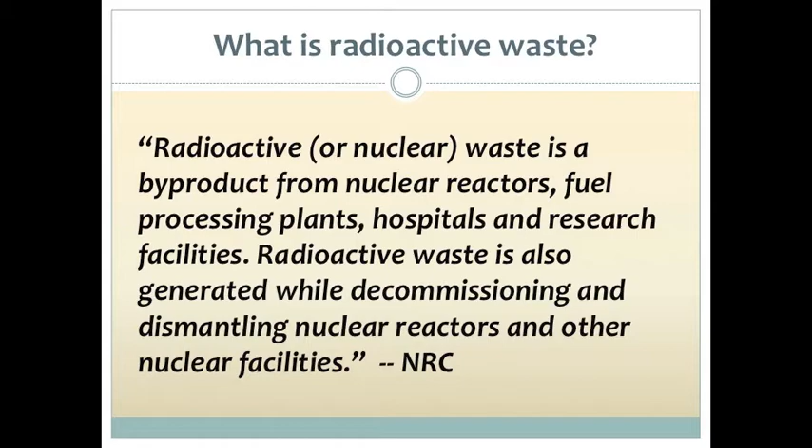So, to begin, what is radioactive waste? The Nuclear Regulatory Commission, the NRC, defines radioactive waste this way. Radioactive or nuclear waste is a byproduct from nuclear reactors, fuel processing plants, hospitals and research facilities, and also weapons manufacturing. Radioactive waste is also generated while decommissioning and dismantling nuclear reactors and other nuclear facilities.

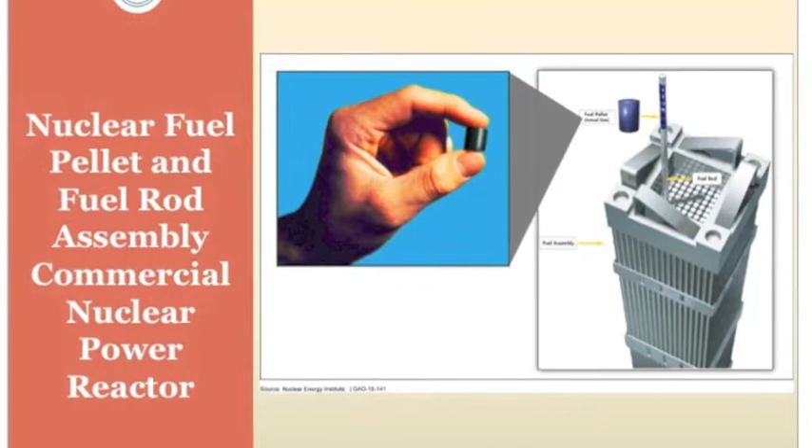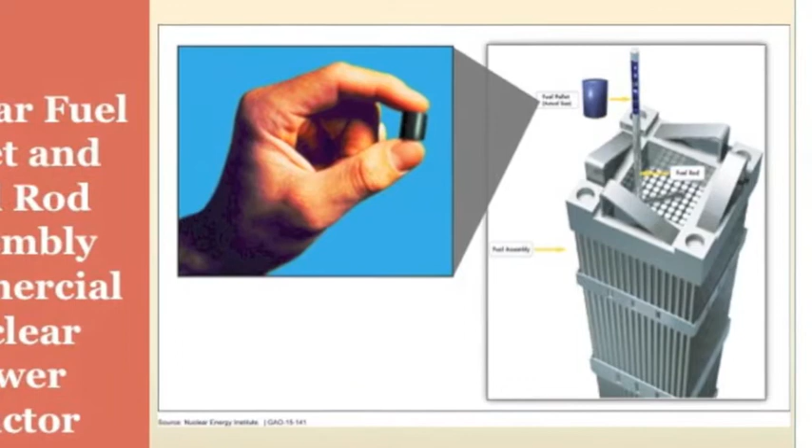Fuel for commercial nuclear reactors is typically made from low-enriched uranium fashioned into thumbnail-sized ceramic pellets of uranium dioxide. These pellets are fitted into 12 to 15-foot hollow rods referred to as cladding, which are made of a zirconium alloy. The rods are then bound together into a larger assembly. A typical reactor holds about 200 to 800 fuel assemblies. Before the rods are used, they are only slightly radioactive, and they can be handled without special shielding.

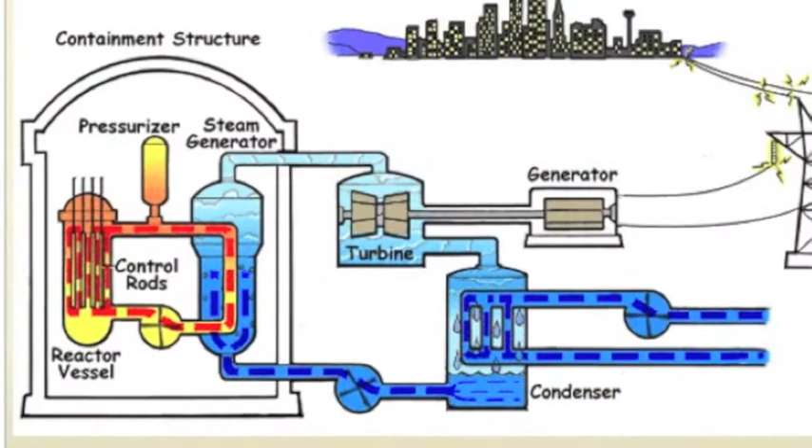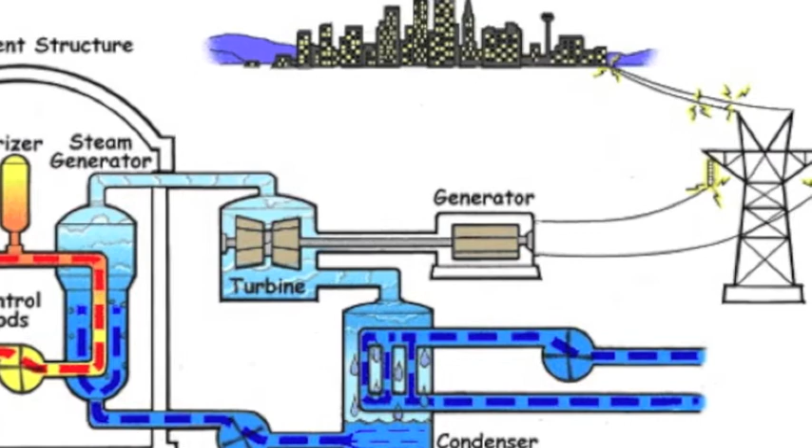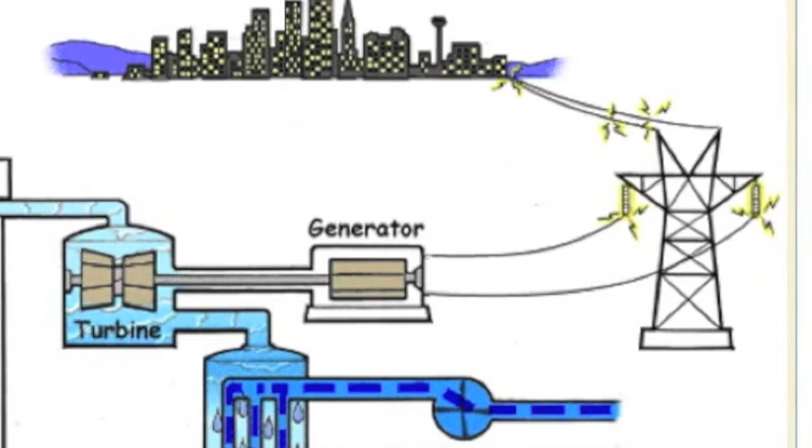The uranium in the assemblies undergoes fission, which is a process of splitting atoms into fragments and neutrons that then bombard other atoms, resulting in additional fission reactions and a sustainable chain reaction that creates enormous amounts of heat and radioactivity in the form of radioisotopes or radioactive substances. The heat is used to generate steam, to turn a turbine, which generates electricity. And we all know the saying is that nuclear power is the most dangerous and most costly way to boil water on the planet.

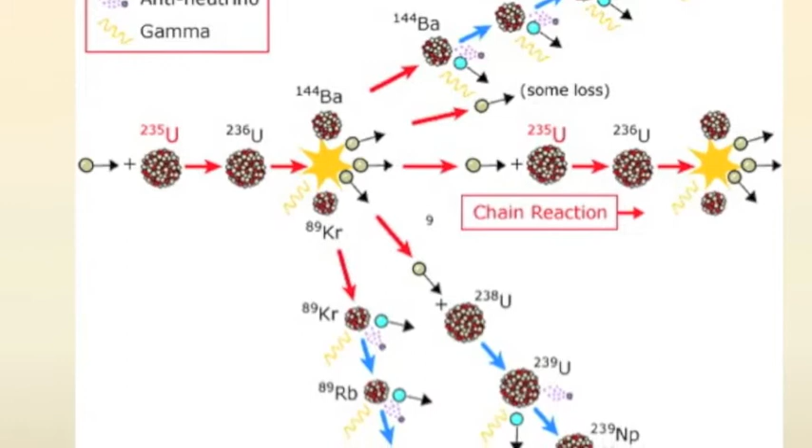During the fission process, 2 things happen to the uranium in the fuel. First, uranium atoms split, creating energy that's used to produce electricity. The fission creates radioactive isotopes of lighter elements such as cesium-137 and strontium-90. These isotopes account for most of the heat and penetrating radiation in high-level waste. Second, some uranium atoms capture neutrons during fission. These atoms form heavier elements such as plutonium. These heavier than uranium, or transuranic elements, do not produce nearly the amount of heat or penetrating radiation that fission products do, but they take much longer to decay. Transuranic waste, also called TRU, accounts for most of the radioactive hazard remaining in high-level waste after 1,000 years.

Radioactive isotopes eventually decay or disintegrate to harmless materials. Some isotopes decay in hours or even minutes, but others decay very slowly. Strontium-90 and cesium-137, for instance, have half-lives of about 30 years, which means half of the radioactivity will decay in 30 years. Plutonium-239 has a half-life of 24,000 years.

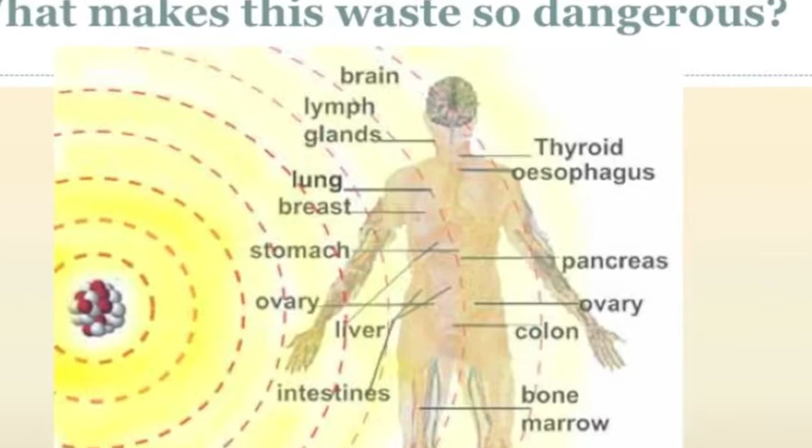All of these radioactive isotopes have the capacity to severely affect and destroy DNA, causing disease and illness. Iodine-131, for instance, concentrates in the thyroid, causing thyroid cancer. People are contaminated with it by drinking milk from cows that have eaten contaminated grass. It also affects the ovaries, which causes birth defects, mutations, and miscarriages.

Strontium-90 mimics calcium, so it goes straight to the bone, and it can cause leukemia, and is most dangerous for pregnant women and fetuses. Cesium-137's half-life of about 30 years is long enough that objects and regions contaminated by cesium-137 remain dangerous to humans for a generation or more, but it is short enough to ensure that even relatively small quantities of cesium-137 release dangerous doses of radiation.

Plutonium-239 emits alpha radiation. It is highly toxic as well as long-lived. One microscopic speck in the lung will cause lung cancer. Once it enters your body, it will never leave.

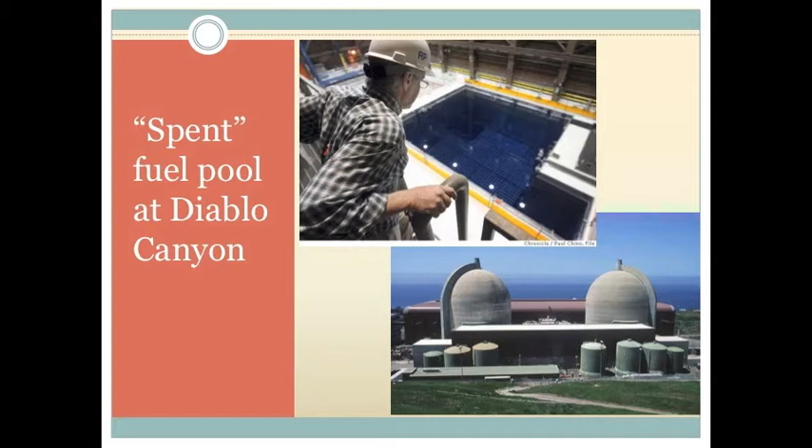Each of Diablo Canyon's 2 reactor units are refueled about every 18 months. Once a reactor core has gone critical, meaning it has been used during a reactor operation, highly radioactive nuclear fission products have formed in the core, and the core has become highly radioactive. Refueling involves taking the expended core out of the reactor and putting in a new core with fresh nuclear fuel.

When reactor operators first remove spent fuel from a reactor, it is thermally hot and intensely radioactive and must be immersed in deep pools of water, which cools the spent fuel and shields the environment from it. These are called spent fuel pools.

The spent fuel pool at Diablo Canyon is in an in-ground pool covered by a large metal building, and that is the rectangular building just this side of the domes. That is where the spent fuel pools are housed.

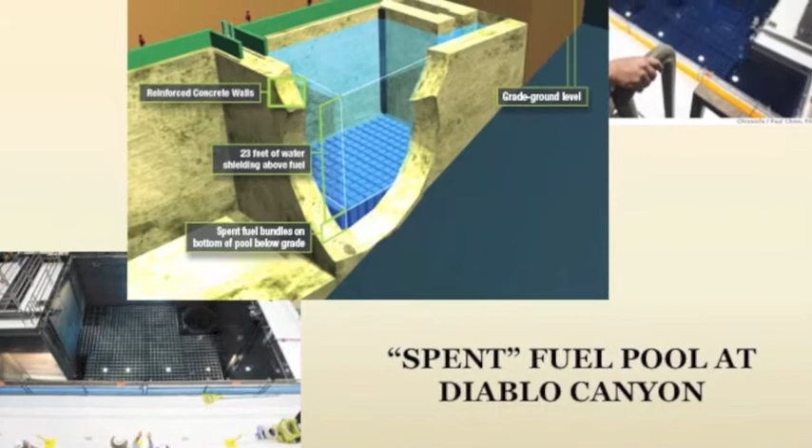Water loss in the spent fuel pool could lead to a catastrophic spent fuel pool fire. Water could be lost from a spent fuel pool through leakage, boiling, siphoning, pumping, displacement of objects falling into the pool, or overturning of the pool.

These modes of water loss could arise from events, alone or in combination, that include acts of malice or terrorism by persons within or outside the plant, an accidental aircraft impact, an earthquake, dropping of a fuel cask, accidental fire or explosions, and a severe accident in the adjacent reactor, which, through the spread of radioactive material and other influences, affects the ongoing cooling and/or water makeup of the pool.

If the fuel were exposed to air and steam, the zirconium cladding would react exothermically, catching fire at about 800 degrees Celsius. This type of fire is almost impossible to extinguish.

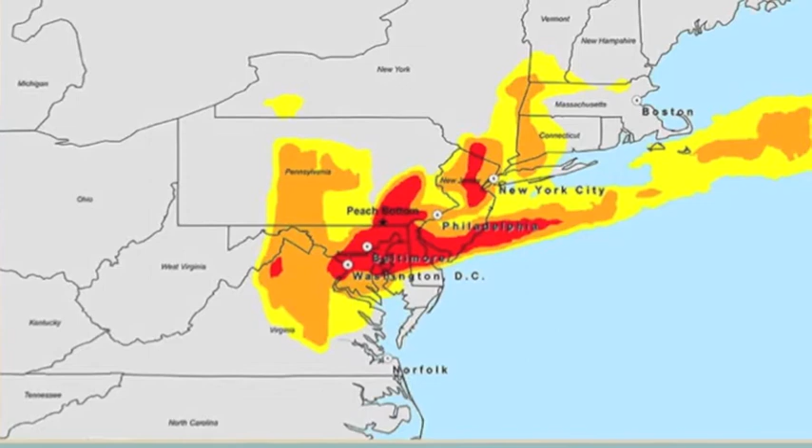This image captures the spread of radioactivity from a hypothetical fire in a high-density spent fuel pool at the Peach Bottom Nuclear Power Plant in Pennsylvania. Imagine, if you will, that plume extending away from Diablo Canyon.

Of great concern is the large amount of cesium-137 that is contained in the pools. That can be anywhere from 20 to 50 million curies of this dangerous isotope. With a half-life of 30 years, cesium-137 gives off highly penetrating radiation and is absorbed in the food chain as if it were potassium.

As much as 100% of the pool's cesium-137 would be released into the environment if there were a spent fuel fire, according to the NRC.

Spent nuclear fuel typically must remain in a pool for at least 5 years to decay enough to remain within the heat limits currently allowed for dry cask storage systems. When spent fuel is discharged from a reactor at a plant where the spent fuel pool is at maximum capacity, spent fuel equal to the amount of the spent fuel discharged from the reactor must be transferred to dry storage.

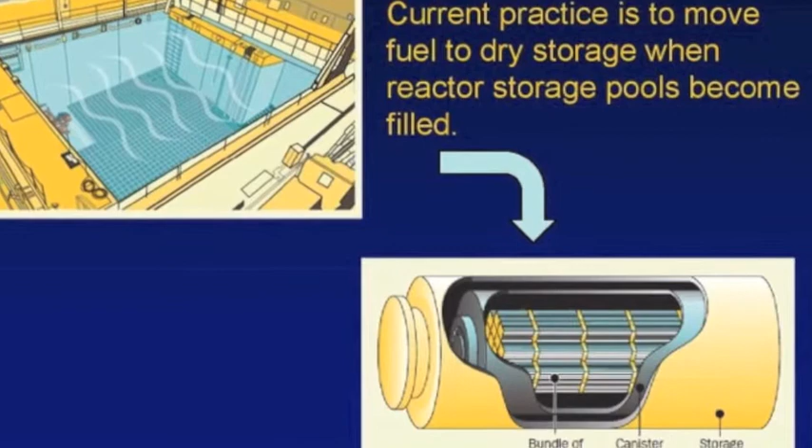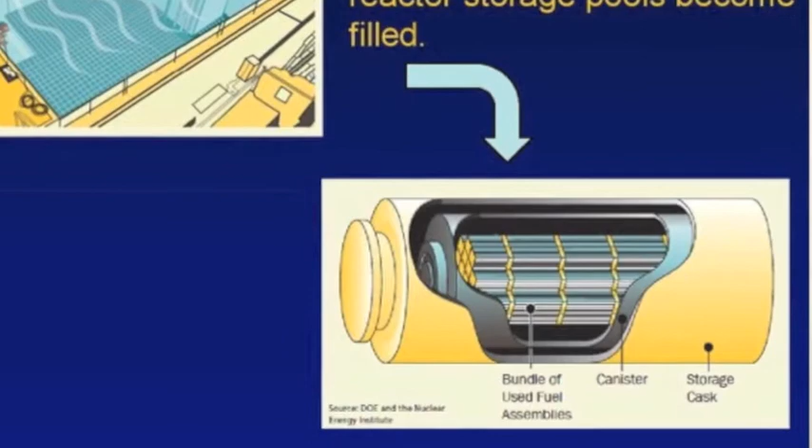The dry storage systems typically consist either of a thick-wall bolted steel vertical cask or a welded steel canister inside a vertical or horizontal steel reinforced concrete cask, and that's what they have at Diablo.

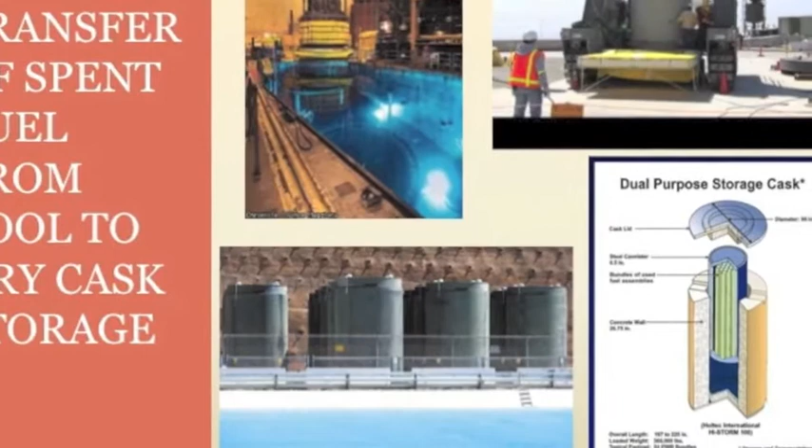To transfer spent fuel to dry storage, reactor operators place a steel canister inside a larger steel transfer cask and lower both into a pool. Spent nuclear fuel is loaded into the canister, a lid is placed on the canister, and then both the canister and transfer cask are removed from the pool. The transfer cask shields nearby workers from the radiation produced by the spent fuel in the canister.

The water is drained and a lid is welded onto the canister. Then the canister and the transfer cask are aligned with a storage cask, and the canister is maneuvered into the storage cask. A lot of room for human error there. And that transfer cask can be reused.

So Diablo Canyon is currently using on-site dry cask storage. And as you will notice, especially up in the center there, that they're in the open, bolted to a concrete pad with no protection from acts of malice or terrorism, accidental aircraft impact, or other catastrophic events.

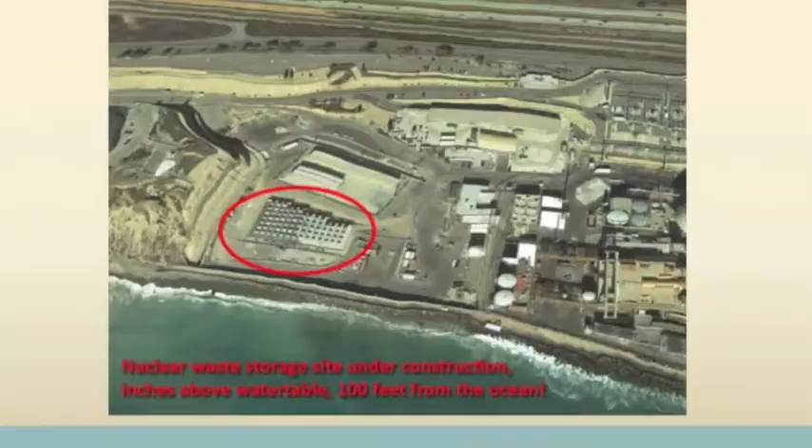At Diablo Canyon, at least the dry cask storage is uphill from the plant and a pretty great distance away from the ocean. At San Onofre, it's just inches above the water line and about 100 feet away from the ocean.

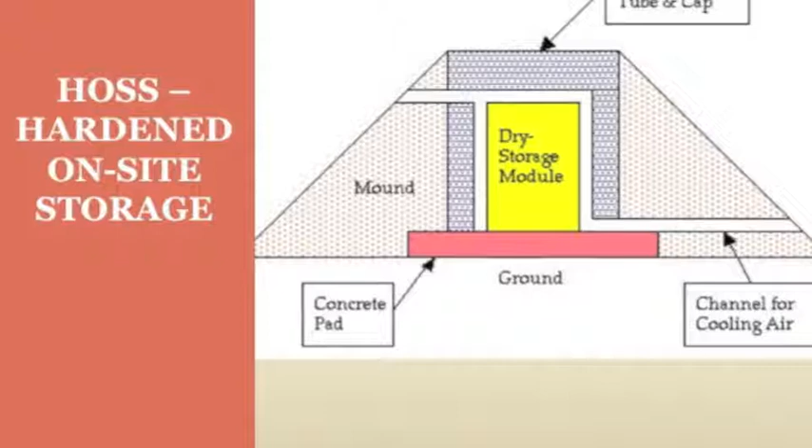So isn't there a better way? You may be asking. Yes, there is. Hardened on-site storage, or HOSS, allows waste generators to store high-level waste as close to the site of generation as possible, thereby exposing fewer people to radiation as safely as possible.

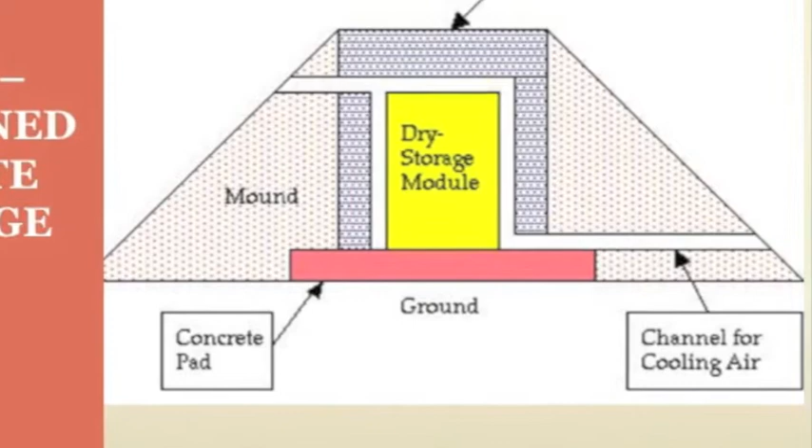Rather than storing dozens of vulnerable dry casks next to each other in the open air, the HOSS principles, established by concerned citizen mandate: irradiated fuel must be stored as safely as possible, as close to the site of generation as possible.

HOSS facilities must not be regarded as permanent waste storage and thus should not be constructed underground, and the waste must be retrievable. The facility must have real-time radiation and heat monitoring for early detection of problems with containers. The overall objective of HOSS should be that the amount of releases projected in even severe attacks should be low enough that the storage system would be unattractive as a terrorist target. Placement of the individual canisters should be such that they're difficult to detect from outside of the area.

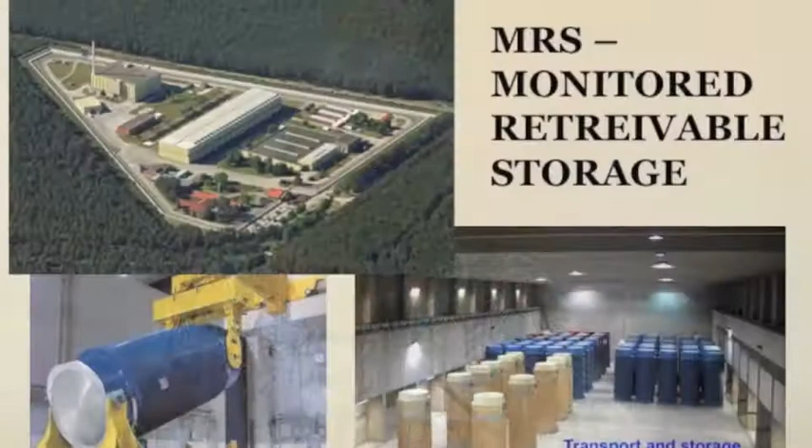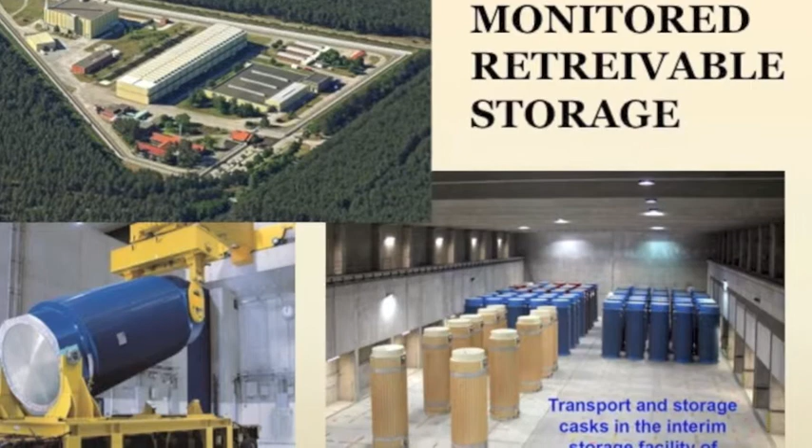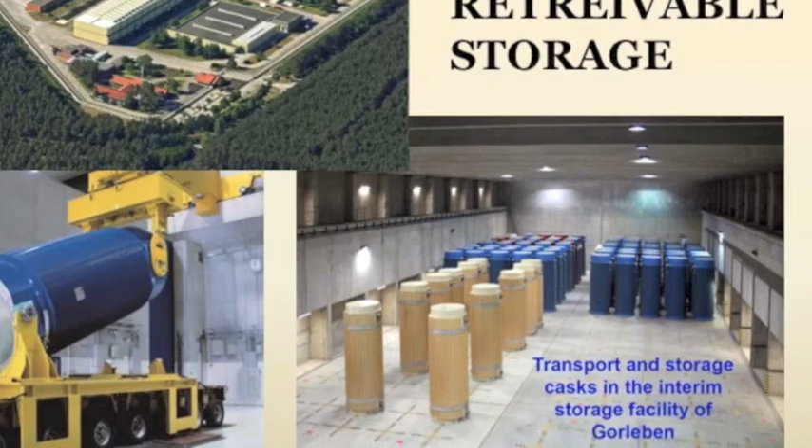In Germany, they have interim storage of their waste in what are called monitored retrievable storage systems. These buildings were originally designed to provide additional radiation shielding beyond that provided by the cask itself, to reduce doses at plant site boundaries to background levels. Some of these buildings are sufficiently robust to provide protection against crashes of aircraft. The casks are able to be continually monitored and can be repaired robotically, and any leaks or other release of radioactivity would be contained in the building.

We in San Luis Obispo County are not the only ones dealing with this issue. There are nuclear power plants that have been closed for quite a while, like Humboldt and Rancho Seco. There are nuclear power plants that have recently closed, such as San Onofre, Vermont Yankee, and Fort Calhoun. And there are nuclear power plants that are scheduled to close, such as Diablo Canyon. Each and every one of these facilities has produced thousands of tons of nuclear waste that will have to be kept isolated from the environment, and all have tough decisions to make about how to do so in the safest manner possible.

The big question remains: how will this waste be safely stored, isolated from the environment for thousands of years? Is there a final answer?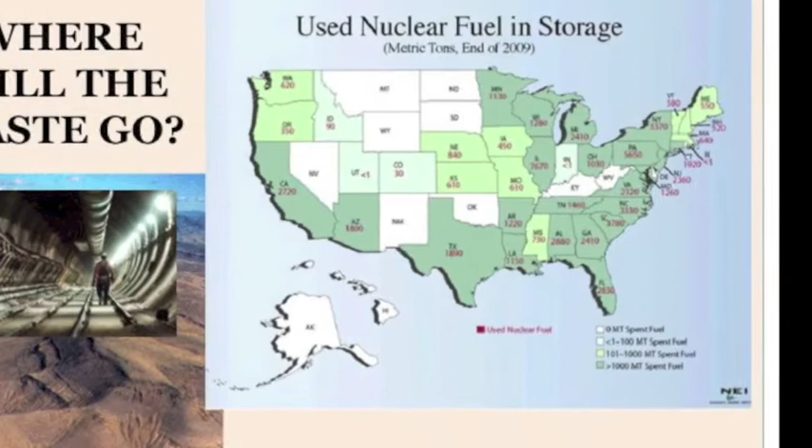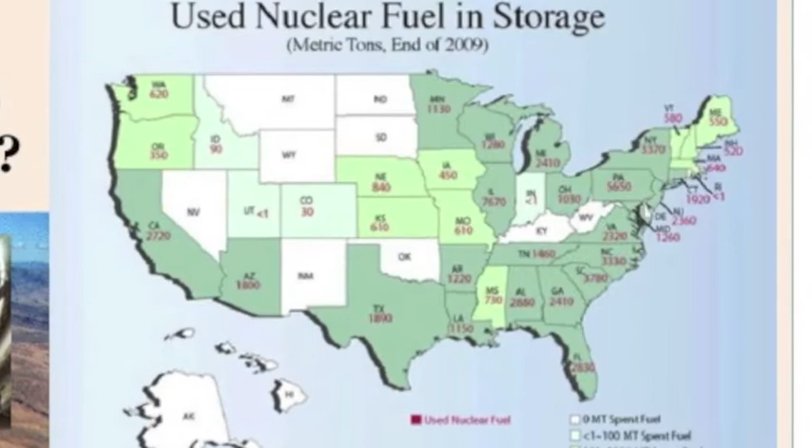At this time, there is well over 76,000 metric tons of spent nuclear fuel that has been produced by nuclear power plants nationwide, and the inventory is increasing by about 2,200 metric tons a year. In addition, nuclear weapons production and other defense-related activities have resulted in about 13,000 metric tons of spent nuclear fuel and other high-level waste. This high-level waste is extremely radioactive and needs to be isolated and shielded to protect human health and the environment. It is currently being stored primarily at sites where it was generated, like Diablo Canyon. After spending decades and billions of taxpayer dollars to research potential sites for a permanent disposal site, including the Yucca Mountain site in Nevada, the nation remains without a repository for disposal, and future projects are unclear.

They are trying to revive Yucca Mountain, and that's what we will be talking about next time.

It is clear that we have a lot of work to do in order to protect our coastline, ourselves, and our future generations from the nuclear waste that will be left behind when Diablo Canyon closes. What we are left with are a lot of questions and a lot of work to do.

So I am now pleased to introduce to you Donna Gilmore of San Onofre Safety. She has done an incredible amount of research into the casks that are used in dry cask storage, as well as in other safety issues at nuclear power plants. Her website, sanonofresafety.org, is used around the world by journalists, engineers, elected officials, regulators, and the general public for credible information on nuclear safety issues. Donna? Thank you.

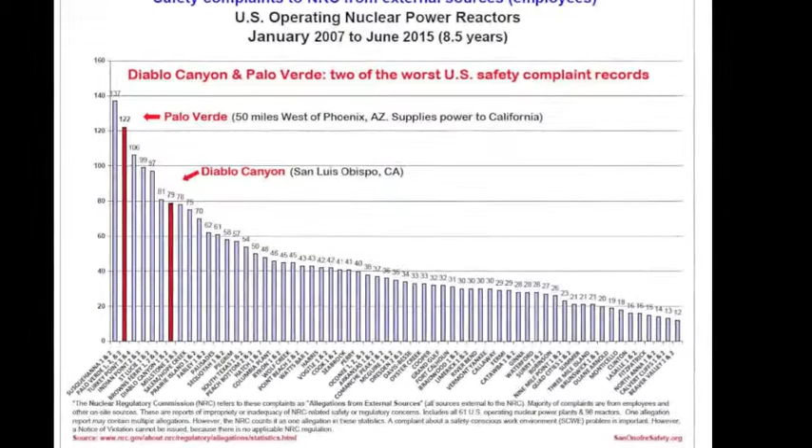The red bar on the left, those are the number of safety complaints from employees to the Nuclear Regulatory Commission for things they tried to get their bosses to take care of that they didn't. Employees that complain to the NRC risk their job because they get retaliated against for doing this. So these are not things to be taken lightly.

So they have one of the worst records in the whole country. All these others are all the other nuclear plants in the country. So when PG&E tells you they put safety first, show any elected official this chart. This is NRC data. At the bottom you'll see a link to the Nuclear Regulatory Commission system. This is all statistics from the NRC that I put in a visible chart.

This worked very effectively in Southern California. Republicans, Democrats, it didn't matter. You show them this chart with credible data, and it's really helpful. So go to the next slide.

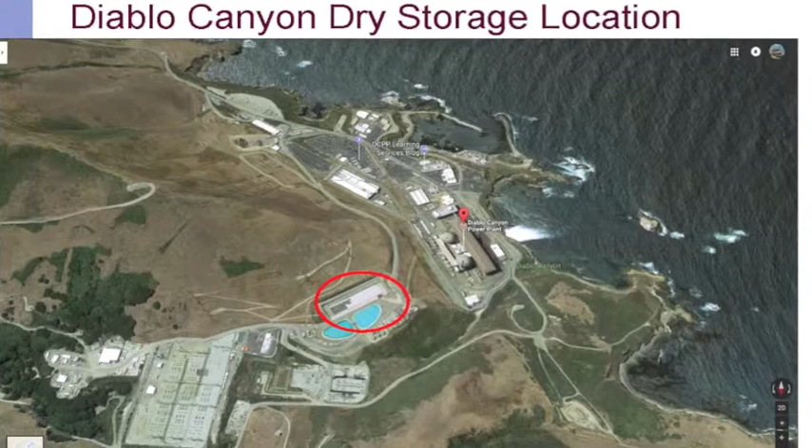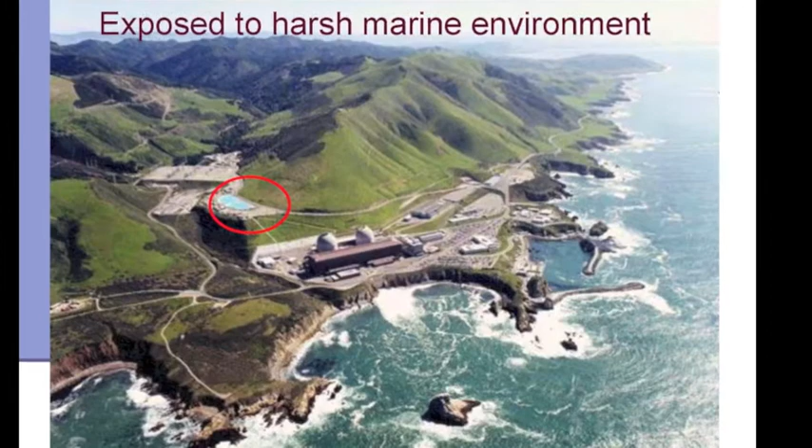Okay, this is the location of where those waste cans are, in that circle there. Go to the next slide. And look at how close it is to all that water, okay?

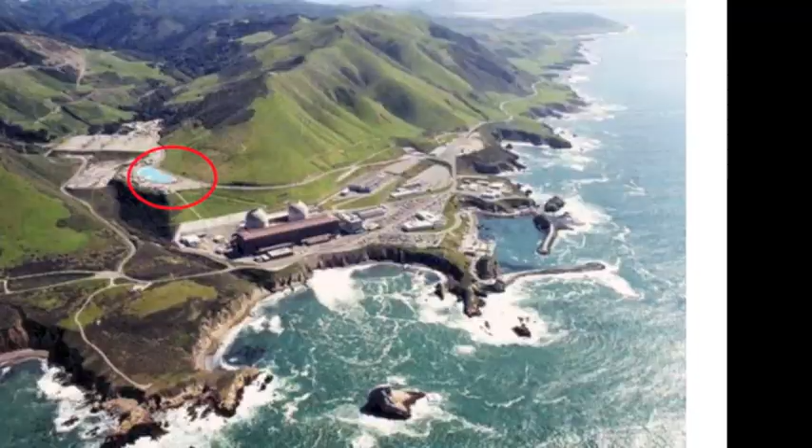Salt water is highly corrosive to stainless steel, which is what these canisters are - the fuel is stored in. It's stored in stainless steel containers that are only a half inch thick, okay? Go to the next slide.

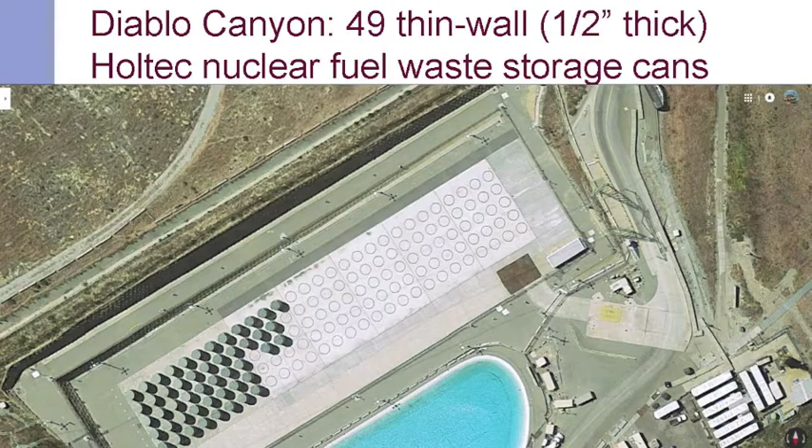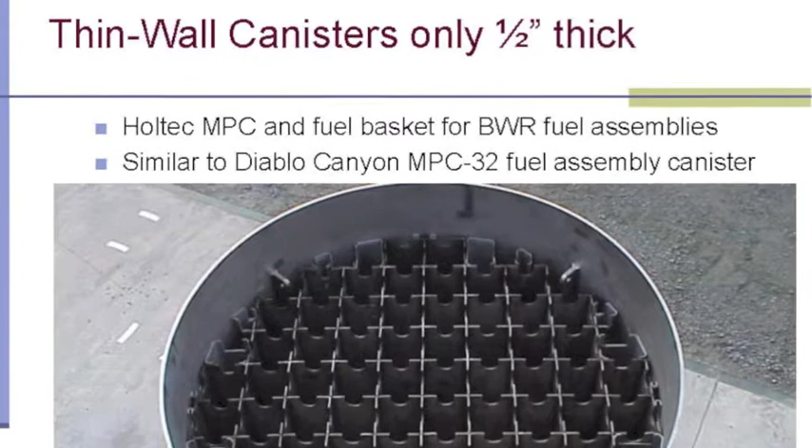This is not one of the Diablo ones, but it's close. See, that's just half inch thick, and the fuel assemblies go into those slots - they call that a basket. I'll be mentioning that later, but it's only a half inch thick. And they tend to hide this information from you, from elected officials and everyone else, the fact that it's that thin. Go to the next slide.

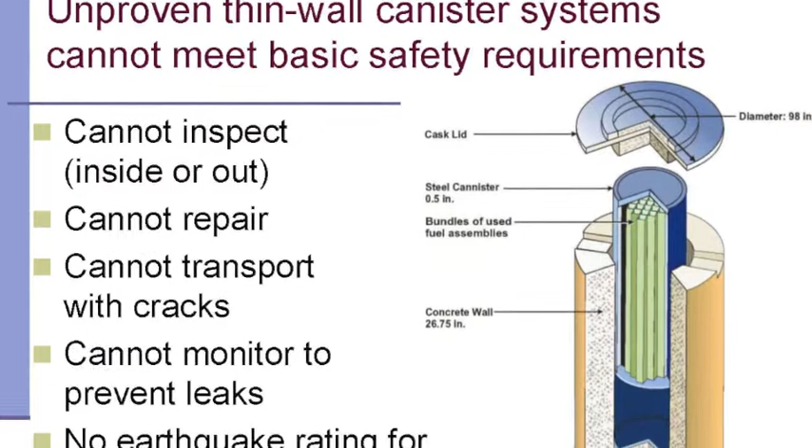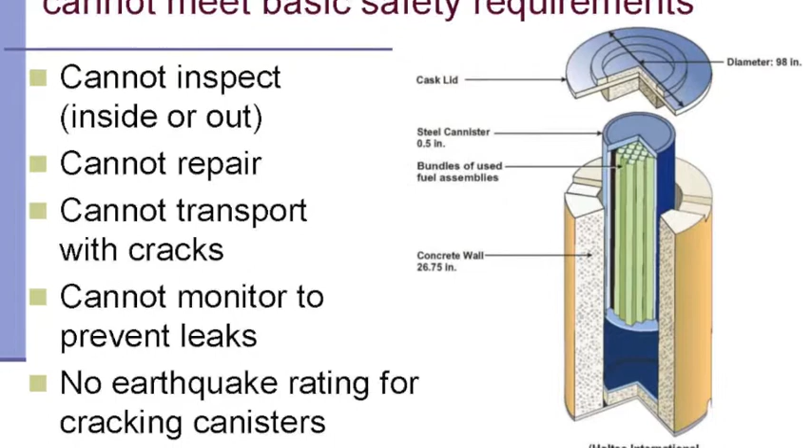Okay, what I learned about these canisters - I listened into an NRC technical meeting where they talk about their problems, and they said in that meeting that they cannot inspect them inside or out. They've discovered that they can crack from salt air. Who would think? Metal and salt? Who would have thought? Who lives by the ocean here, okay? And the kicker is they have no way to inspect.

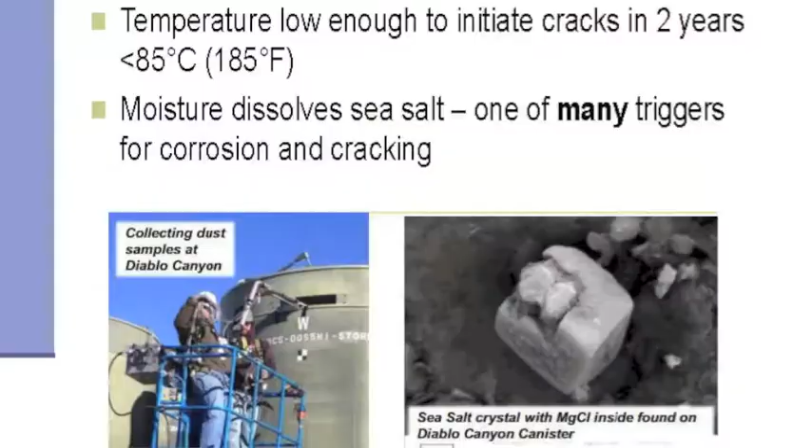These canisters are not safe to get next to with just this thin stainless steel. They put them in thick concrete casks. But there's air vents - one in the bottom, one in the top. There's air vents so the canister gets convection cooling, otherwise it would overheat.

So the only thing protecting us from a major radiation release is a half-inch piece of stainless steel, okay? And they have no way, no technology, to find cracks. The NRC said once a crack starts, it takes 16 years and it will grow on its own through the wall of the canister. And the president of Holtec, which makes the Diablo canisters, we have him on video saying that even a microscopic through-wall crack will release millions of curies of radionuclides into the environment.

And in the face of that, if you could figure out a way to repair them, it wouldn't even be feasible, because it just introduces another area for corrosion. So this is what they've given us. So if you can't inspect, you can't repair.

There's federal regulations - you cannot transport with even partial cracks for everybody. So everybody that wants us out of here, they have no way to know if there's cracks. They know they're susceptible to cracks. And also the canisters are welded shut, so you don't know what's going on inside with the fuel or the baskets. So they really aren't transportable in this system.

And a partially cracked canister has no seismic rating. PG&E talks about how these are safe, we've got this really high seismic rating, but they don't mention if you have partial cracks, there's no rating for that. So in essence, as far as we know, there is zero seismic rating, okay?

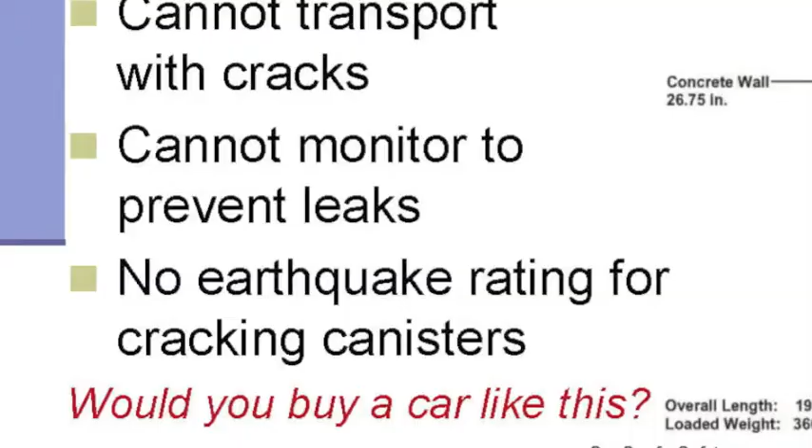And go back again - now, would you buy a car like this? This is a very effective way to talk to people, and we did this with Darrell Issa, my representative, his chief of staff down there. We said, would you buy a car that you couldn't inspect, repair, maintain, and that gave you no warning before something major failed? Would you buy that car? You don't need to be a nuclear engineer.

I said this to his chief of staff: would Darrell Issa want to store waste in something that couldn't be inspected or maintained? And well, of course not.

He said that's common sense, you wouldn't want to do that, but that's what they're doing. So if you're trying to get elected officials to understand this and feel qualified, give them the car analogy so they feel comfortable having an opinion. You can't pick a technology, but you can pick requirements. You can say we don't want this waste here, but while it's here we want to make sure it can be inspected, maintained, and monitored to prevent leaks, not just tell us after they leak, but to prevent leaks. It's a very simple thing. We've done city council resolutions with this. It's worked very effectively, and it's a way to raise awareness.

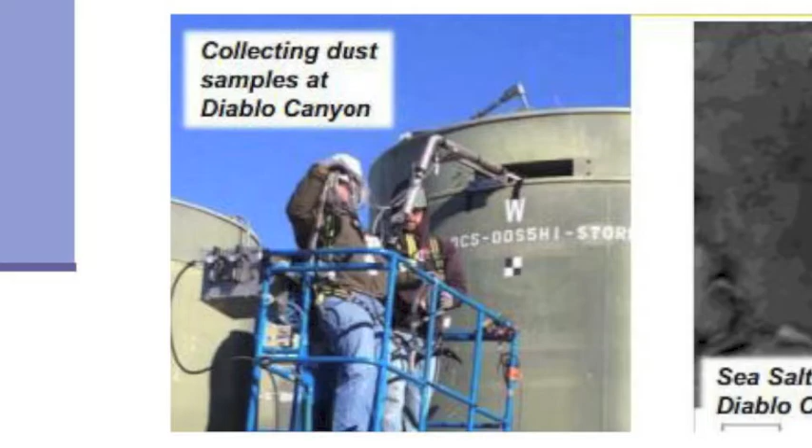Let's go to the next slide. This is a close-up picture of the Diablo Canyon canister. They can't inspect them, but what they did is they took a couple of Diablo canisters, and that's one of the air vents near the top. They went in there and used some kind of a brush. They never clean them, so they're full of dust particles and things. They scraped some particles off to see if there was any salt from the ocean. They found magnesium chloride, sea salt, which is one of the most corrosive things to stainless steel.

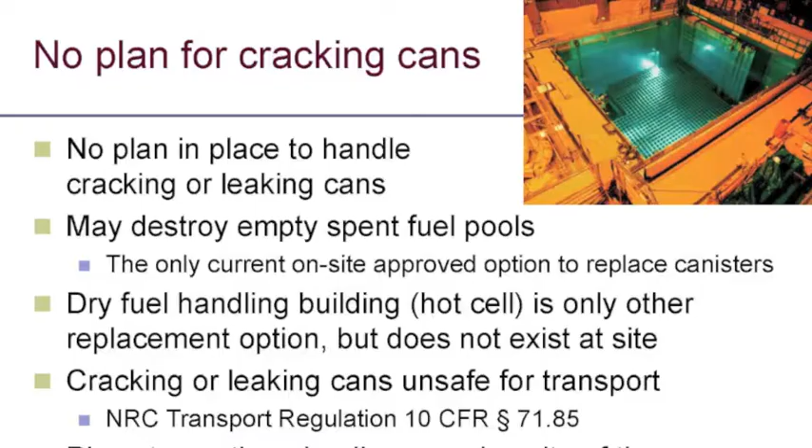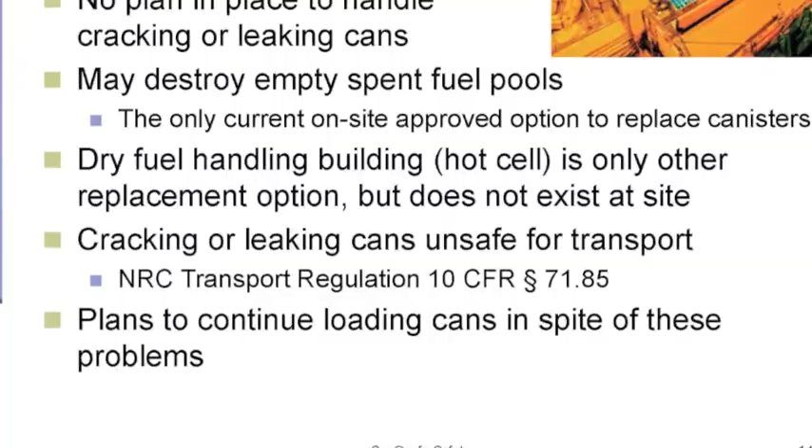And the NRC, the Nuclear Regulatory Commission, actually is going to allow them to destroy the spent fuel pools. We have this fight right now at San Onofre. They want to destroy the pools once they're empty. We need to stop that. The pools are the approved option in the technical specifications that they have from the NRC. It's the only approved option to unload a canister or repair a canister. So if you have a partial crack canister, it can't be transported, and if they get rid of the pool, are they really planning to have this stuff go away? It doesn't sound like it.

I haven't seen this for Holtec yet, but what just happened about a week ago at San Onofre is their vendor, Areva, has submitted a request to the NRC to not only get rid of the pools, but they only want to have to measure radiation levels from the inlet air vent in the door. They do not want to have to measure radiation levels from the outlet air vent. The canisters are in the overpack, they use convection cooling, where air comes in the bottom and goes out the top. The hot air goes out, so you've got a distribution system going like this.

So if you have a through-wall crack, the radiation, most of it's going to go through the outlet vent. Well, they don't want to have to measure that anymore - they only want to measure where the air goes in. So I don't know why else they would want to do that other than to be able to say we meet all NRC regulations. They only want to report peak radiation levels at the inlet vent. So what I see here is a plan to hide leaks from us. We've got no early warning monitoring. They have temperature monitoring, but by the time it gets too hot, it's too late. The rest of the world uses thick wall casks that don't have these problems.

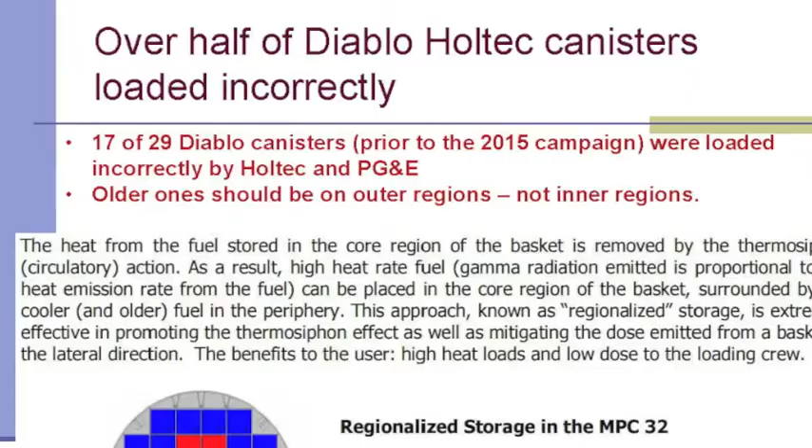Now, at Diablo Canyon, they actually loaded half of the fuel assemblies incorrectly. They were supposed to put the ones that cooled the longest on the outside and the hotter ones on the inside—heat travels out—and they did it the opposite way, over like two or three loading periods.

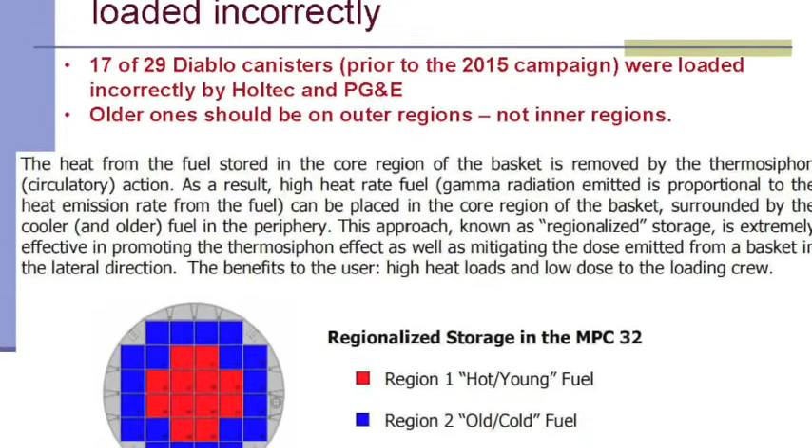So what did the NRC do? No problem, we'll approve an exception. That's what they did. And I asked the manager over at the NRC, why did you approve an exception? This was done for a reason, so the fuel doesn't become damaged. And she says, well, we've determined that it's okay. And I said, well, how do you know it's okay? These things are welded shut, you don't know what's going on inside. And she just got quiet. But that's what they do. Okay, go to the next slide.

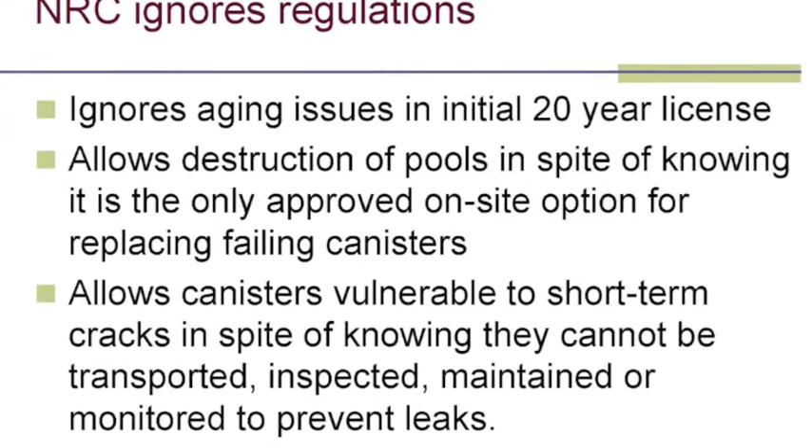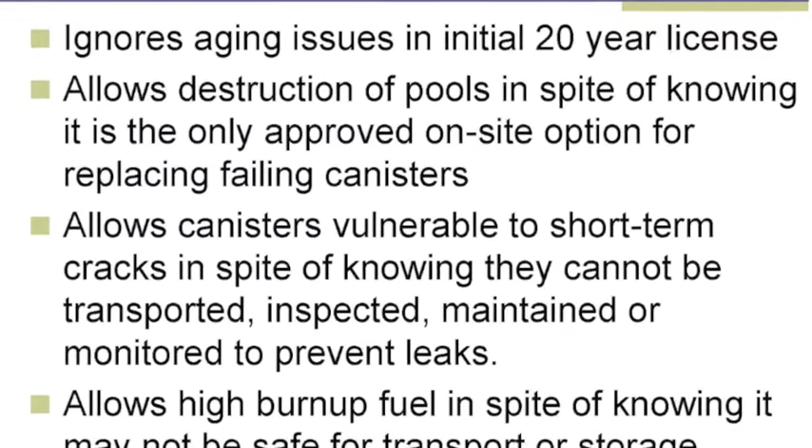The NRC, when they approve a license, they give them a 20-year license. They ignore anything that happens after 20 years. So they do not even consider aging management when they give this approval. Unbelievable—I have this all in written evidence.

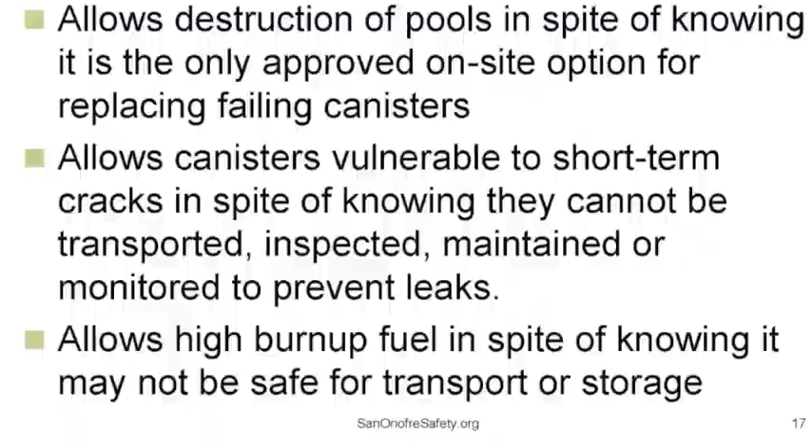And they allow the pools to be—the NRC knows all these things, and yet they continue to do this. There's something called high burn-up fuel, which is fuel they allow to burn longer in the reactor. That makes them more money, but it makes the fuel over twice as radioactive and over twice as thermally hot. They also know it damages the rods—they call it fuel cladding, the zirconium rods. When you have damaged rods, it becomes brittle, so it's more likely to fail. And the NRC is still studying whether just train vibrations is going to cause the fuel cladding to fail because it's so brittle. They're still studying that. Okay, let's go to the next one.

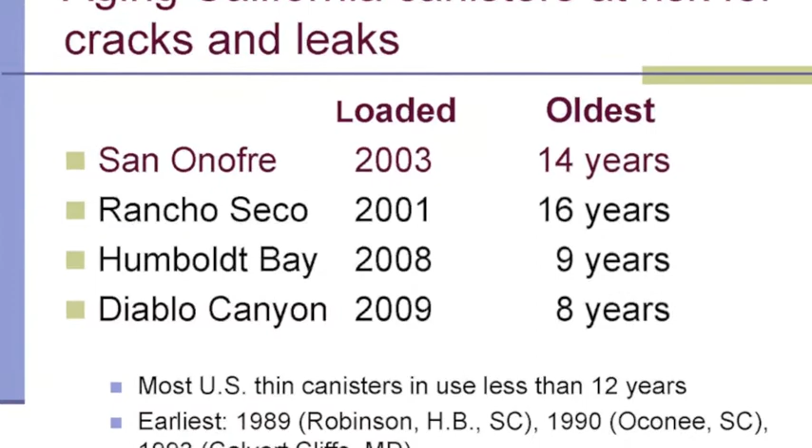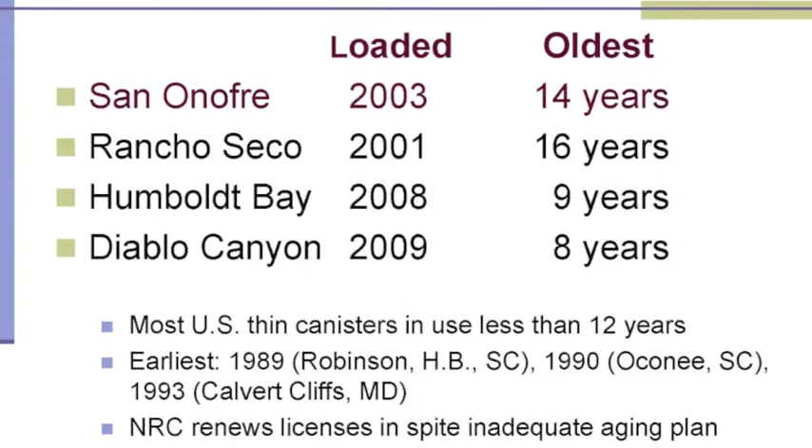Okay, this is a California picture. Ours, San Onofre's been loaded, are 14 years old. Rancho Seco are the oldest in California, 16, then Diablo Canyon. So this is a relatively new technology. We're just now starting to get to the point where we could have some major problems. So this is a now problem—we need to solve this now. It's not like waiting for some long-term problem. Go to the next slide.

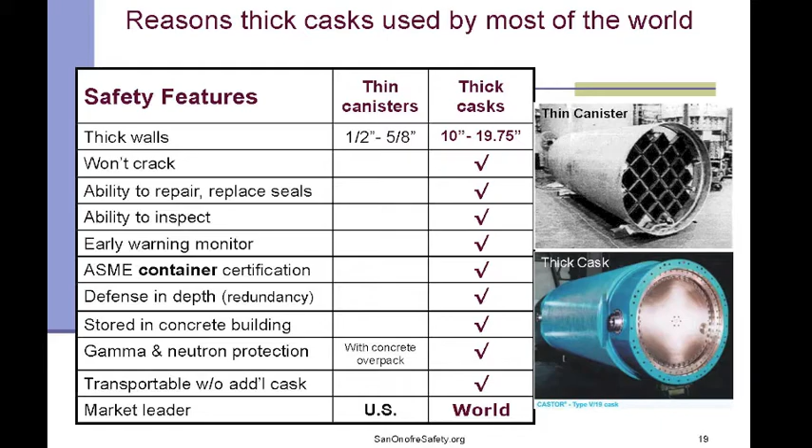Okay, the rest of the world, most of the rest of the world uses thick wall casks, 10 to 19.75 inches thick. The 10-inch ones are the French Areva model that were used also at Fukushima, and the 19.75 ones are a German model. They were ductile cast iron versus a carbon steel model. And you can look right here at the difference—one's cracked, one's, you know, I don't need to read that to you. You can take a look at this list.

And why are we using anything else? A one-word answer—anybody, one word? Money, exactly. And I have a report from the DOE where they asked the utility, why did you pick this? Well, we want to protect our ratepayer money, we don't want to overspend their ratepayer money—that's their reason. They knew these things weren't going to last, but after 20 years, they were hoping it was going to be the federal government's problem.

But it's our problem. So we need to be able to stop the loading of any more thin wall canisters, and we need to get the existing canisters loaded in thick wall casks. That's the only option that I see that we have.

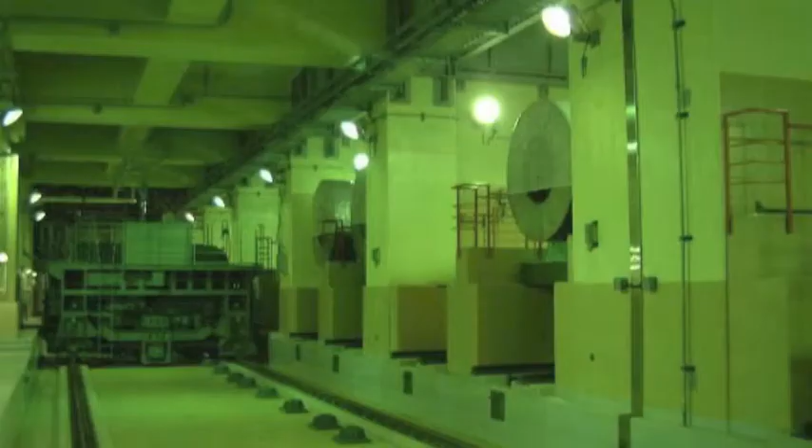The industry was saying, well, put it in dry storage—Fukushima survived and it was in dry storage. Well, guess what? They're thick wall casks, not these thin wall cans that we're using. And when they inspected them, they opened them up because they have bolted lids with metal seals. They have continuous monitoring—if there's a potential seal that needs to be replaced, they get an instant warning and then they can replace the seal.

You know, it's a lot better replacing a seal than dealing with a through-wall crack you can't do anything with. So they're designed to be maintained.

They found out that the basket inside that holds those fuel assemblies was aluminum alloy. Well, these aren't going to last more than 60 years, so they banned the use of aluminum alloy baskets. So I contacted the NRC and said, well, we have aluminum baskets, what about this discovery by Japan? They said, well, we'll get back to you, Donna. That was like two years ago. And I asked Southern California Edison, and they said, oh, we were waiting for the vendor to get back to us. So they're just ignoring this issue.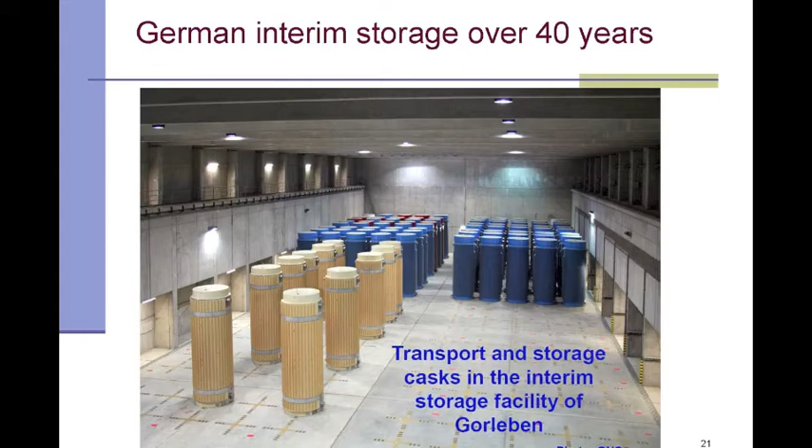Okay, next slide. This is, you've seen this already from the previous one. This is a German model. The United States has some thick wall casks, but they don't put them in buildings.

What they did instead, to just show you kind of how bad we are in this country, instead of putting it in a building, which provides environmental protection in addition to any security protection, they didn't want to cough up the money for a building. So they came up with this cap to go over the top because there's bolts in there. They put a cap over it and set them outside. Well, they collected moisture under the cap. I mean, they took a good design and messed it up. So that's just another thing.

I work with material engineers, nuclear physicists, and this is kind of considered like a model for the best available technology.

So go ahead, go to the next slide. And all these are little abbreviations on the right. These are various countries that use this. You've got Japan, China, Belgium, the US, Germany. I forget what some of them are. Anyway, there's numerous countries that use this, the Areva. There's also another chart for the...

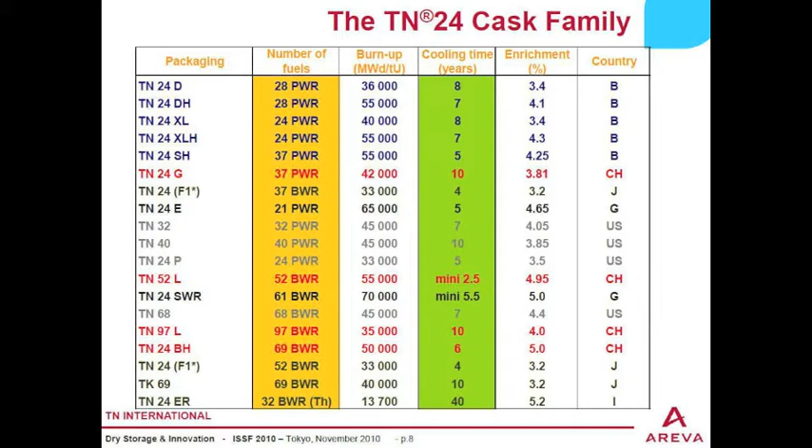...German cask. So they're used all over for storage and transport. The thick wall cask design doesn't need a thin canister inside, and it's designed for storage and transport. So it's kind of like ready to roll.

If you have the thick cask, you have everything - you have storage and you have transport. With the thin wall canisters, they have to take that thin wall canister and put it in a transport cask to transport it. Then they take the transport cask, empty it, and haul the empty transport cask back to go pick up another one. That's a thin wall canister system.

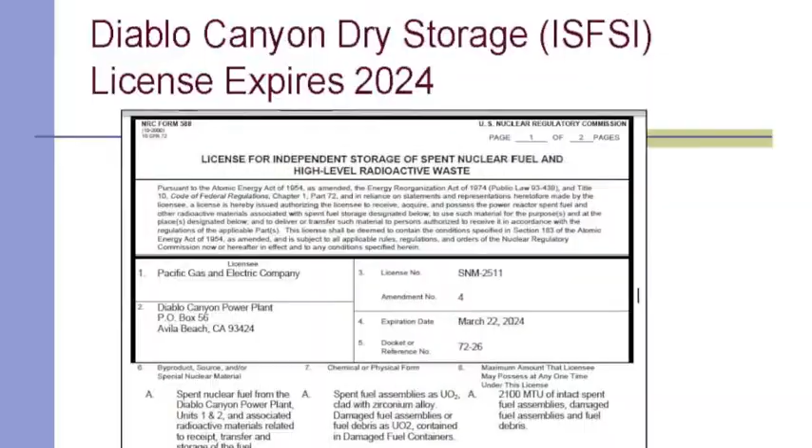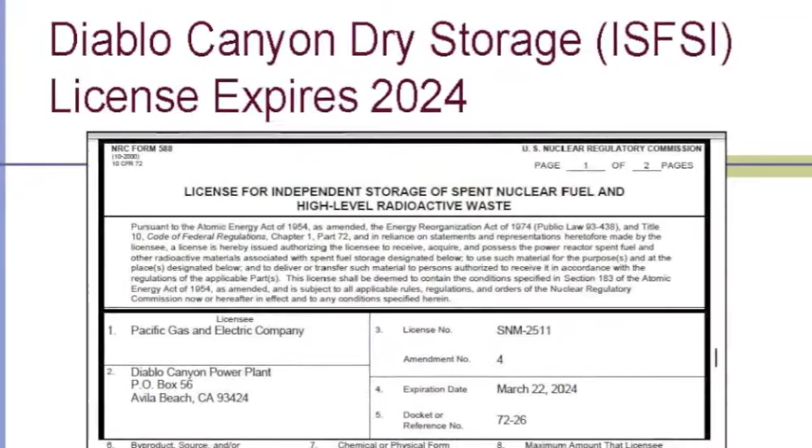Anyway, next slide. In addition to having a license for your canister system, you need a license for your facility. So they call it an ISFSI, Independent Spent Fuel Storage Installation. So Diablo's license expires in 2024 for the site. So one strategy we have is to work with the Nuclear Regulatory Commission.

It's basically, they might as well call it the Nuclear Rubber Stamp Commission. It's a captured organization. But they're useful to sometimes stall at the federal level so you can get some things done at the state level or in another way.

So one option that we have is to go to the Coastal Commission and try to get the Coastal Commission to not approve a renewal of this ISFSI license.

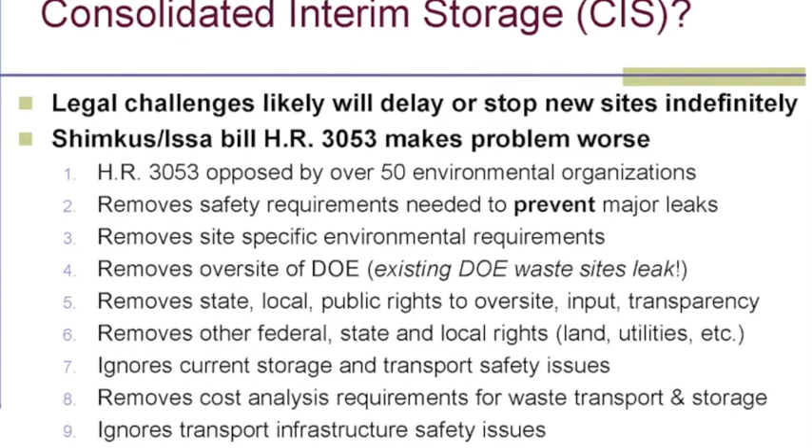Consolidated interim storage - there is a Shimkus bill, HR 3053, that all the elected officials, Democrat and Republicans, want to vote for. I listened to all the hearings in the Energy and Commerce Committee meeting.

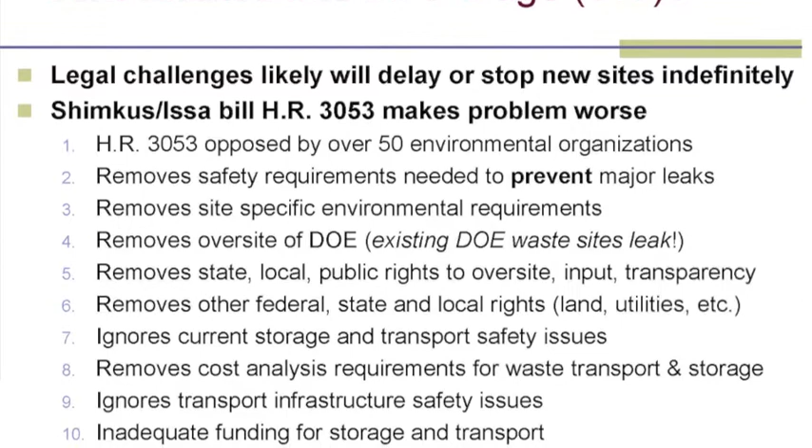Not once did they mention that it removes the safety requirements out of the current law for both storage and transport. They didn't mention they're removing site-specific environmental requirements.

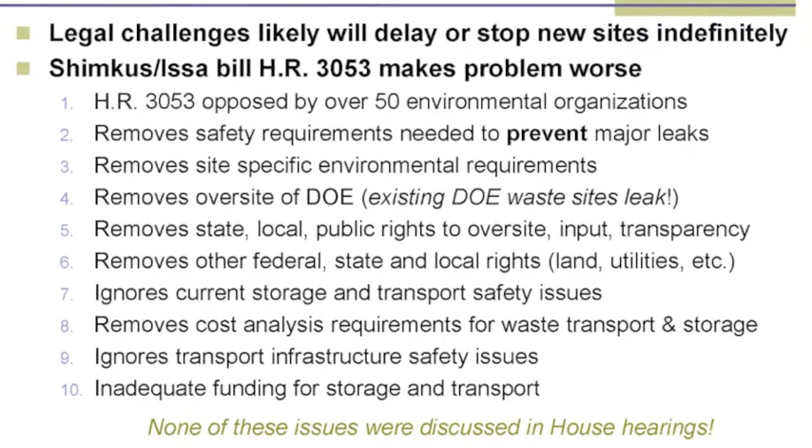Oversight of the DOE is removed. State, local, public rights to oversight, input, and transparency. Once they have an agreement, the idea is for interim storage, the licensee, which would be PG&E, would have an agreement, an MRS agreement, with the Department of Energy to take over. They would take it on site.

They don't have to just take it in transport now. This will allow them to actually transfer the license right where it is to the DOE, eliminating all PG&E liability. That's what this law will do, okay?

I'm not saying they're going to do that, but that will be legal with this if this goes through as law. It removes federal, state, and local rights - land, utilities, etc. In the permanent repository section, they basically can take the land, the utilities, and last I heard, water is a utility. So for the western states, this is a precedent-setting big deal.

They did not pick this up in that energy commerce bill. I spent 2.5 days analyzing this bill so I could find all the problems with it.

So that's still in there, okay? Safety issues - no, they don't have to do any cost analysis. They don't have to deal with safety or transport infrastructure safety issues before they pick a site.

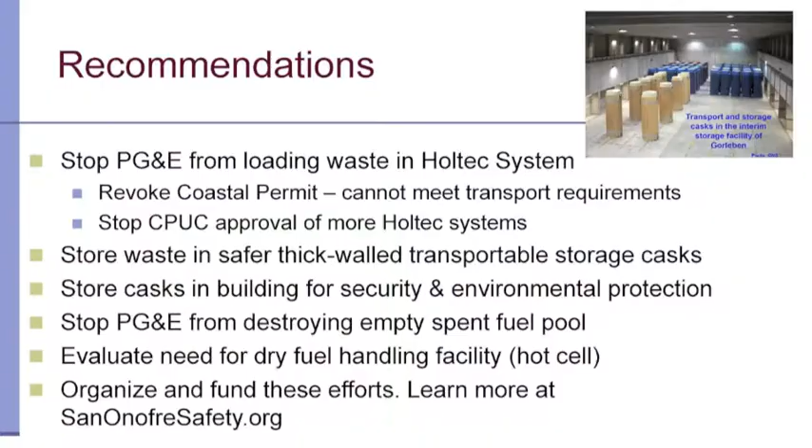Okay, so yeah, I think I was kind of covering this ahead of time. And the CPUC - I intervened in the Public Utility Commission proceeding, this decommissioning proceeding, to try and stop Edison from getting their hands on money to buy more canisters.

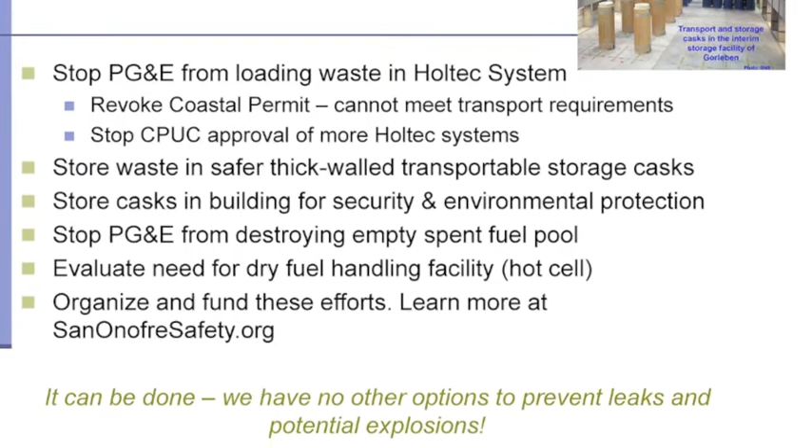However, I made a cost-based case for why they don't have enough money, because these things are going to need to be replaced in the short term, and there's no money for that. So I made a cost-based case, nothing to do with radiation. The judge said my case was meritorious, but out of scope for this proceeding. So they gave him the money anyway.

Okay, so anyway, because of the high burnup fuel, there are hydrides - gases created from the high burnup fuel in the uranium, in the zirconium cladding - and if air gets to that, you could have an explosion.

So we may need a hot cell to unload this and put it in bigger, better casks. That needs to be further evaluated, but from my research, that's what it appears we need because of this high burnup fuel that's got all the hydride buildup. It could use more research, but from what I've read, I'm pretty comfortable that's what we need.

They don't have one - they're very expensive - but at this point, they've made a mess for us and it's going to be expensive to clean it up. So I don't see how we have a choice. That would be the safest way to do it, okay?